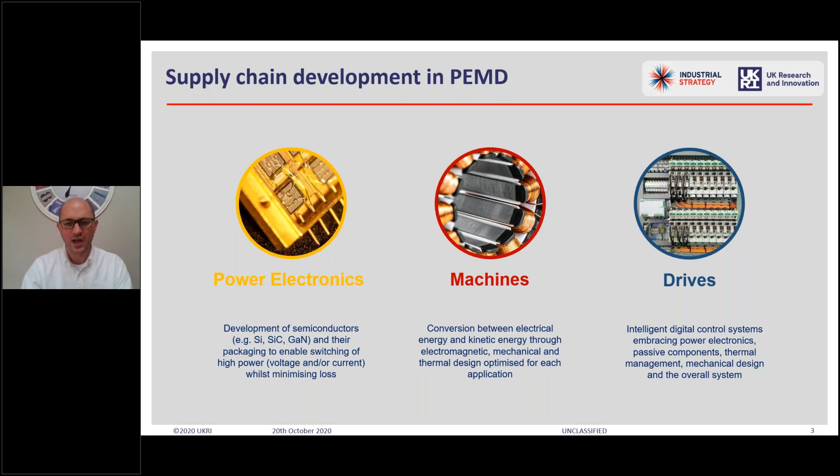And then we're talking about adding intelligence to this. Power electronics are great, motors are great, but we've got to add the intelligence. That covers charging, it covers DC-DC conversion, it covers quality control of electrical energy - anything that really adds intelligence to the power electronics system.

We cover a huge range of sectors. So I've said we want to do these three technologies. In industrial drives we have world-leading companies here - robotics, energy I've touched on, but also marine, aerospace, rail, both rolling stock as well as infrastructure, off-highway, auto and personal mobility. One of the interesting bits for me, and really important to our challenge, is looking at the cross-cutting opportunities between different sectors.

How can we leverage learning, experience and expertise from one sector into another to reduce the time to market, increase volume, and therefore reduce the cost of those parts?

So with that, we are not looking at just providing the funding - we're looking at creating an ecosystem. The funding is there absolutely to do collaborative research and development, but we need to build an ecosystem of people around the country, companies doing that, from SMEs providing tier N services all the way through to the tier 1 and end OEM users, and providing that within an infrastructure such as Driving the Electric Revolution means we can link people together as well.

We can work in conjunction with RIA to go, well actually these people maybe in off-highway, or these people in energy, are looking at very similar requirements - have you spoken to them? Have you connected with them? Really provide more of that investor feel to the money without taking equity, to companies and projects.

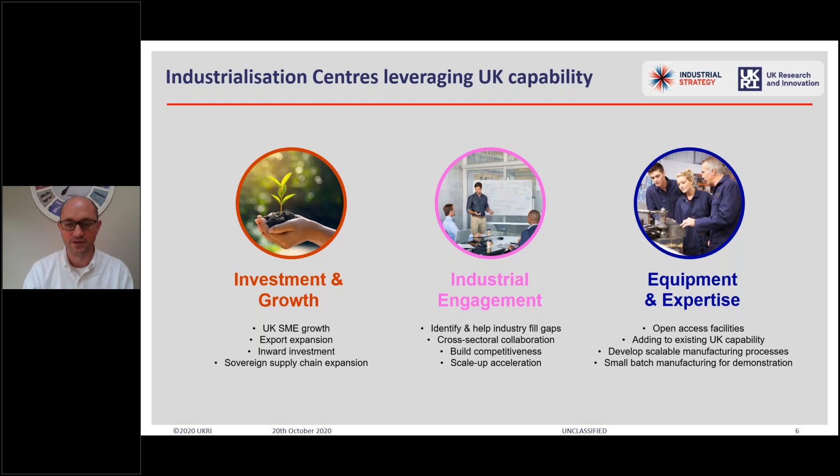And through these industrialisation centres, it gives a front door to the entire RTO and academic network, as well as any industrial companies who have equipment in this space that is open access. So a real opportunity and the front door to engage more.

Finally, the bit that is of significant interest to people: we've already done £7 million worth of programmes last year. We've already finished, closed, and we are now funding £5 million of short, high impact, high resilience supply chain projects on the back of COVID. And excitingly, probably of most interest, next spring we will be doing another £20 million-ish competition of flagship programs, looking at supply chain growth in power electronics, machines and drives.

In addition to that, we are doing work in skills. We have about £6 million ring fenced for that. It's going to make a difference. And if people are interested in that or any of the other areas, I would urge you to get in touch with me. My contact details are here.

Five minutes, not a lot of time to cover what is a huge area, but I'd love to speak to you more. So Richard, hopefully I kept just about the time for you. And I thank everyone at RIA for inviting me to be here with you today.

Top man, thank you very much, Will. That's really useful. You also win the Big Clock Award as well there, so that's a great job. Can I just ask you a quick question, Will, before you disappear?

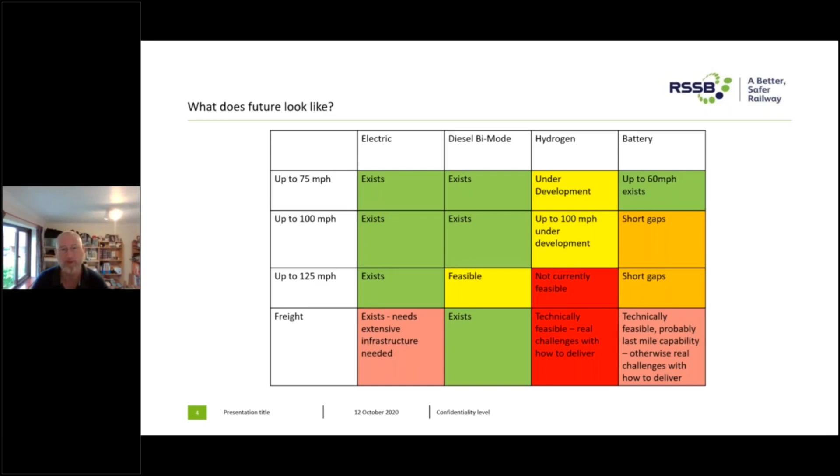The strategic approach, in essence, is where we do have an electrified network, to always run an electric train; where there's a strong case for electrification, to commit to making that transition; and then to make sure that the rail fleet, both passenger and freight trains, are enabled through conversion or replacement to run in electrified form on the electrified network. Where we know we're not going to be able to electrify within the timeframes, we should make an effort at the earliest possible stage to commit to putting in place hydrogen and battery options, so that we can deliver against set targets for decarbonisation over the transition to 2040, when we're removing all diesel-only trains, and on to 2050, where we're nationally now committed to a net zero target.

The task force looked at three key areas. Although we talk about traction being the really big issue, taking about 85% of all energy use directly and indirectly on the railway, we also have to worry about infrastructure and property. Infrastructure being very loosely what we require to run the trains, and property being stations and depots. There are some offices on the property side, but stations and depots are the key issue. We've subdivided those within the task force and within subsequent project work so that we're being clear about the areas we need to tackle.

I've said a little about passenger and freight, also about electrification, hydrogen and battery infrastructure. We also need to think about other aspects of infrastructure that support the railway, such as yellow plant and lineside generation in place.

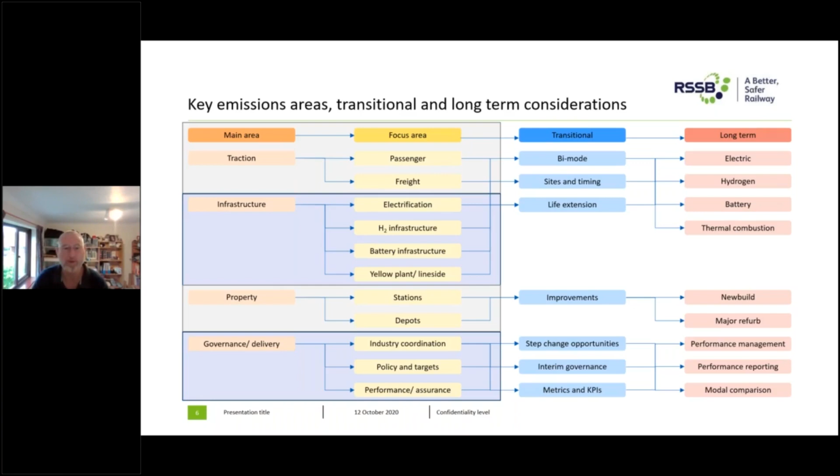And then within the governance and delivery side, we do know that we're going to have to hit interim targets, both to meet national carbon budgets, but also any requirements put in place on the rail industry to deliver intermediate decarbonisation improvements, as well as to look at step change opportunities such as where fleet replacements do take place. We also have to bear in mind that we're supporting DfT's efforts as part of the national strategy for decarbonisation within the Transport Decarbonisation Plan.

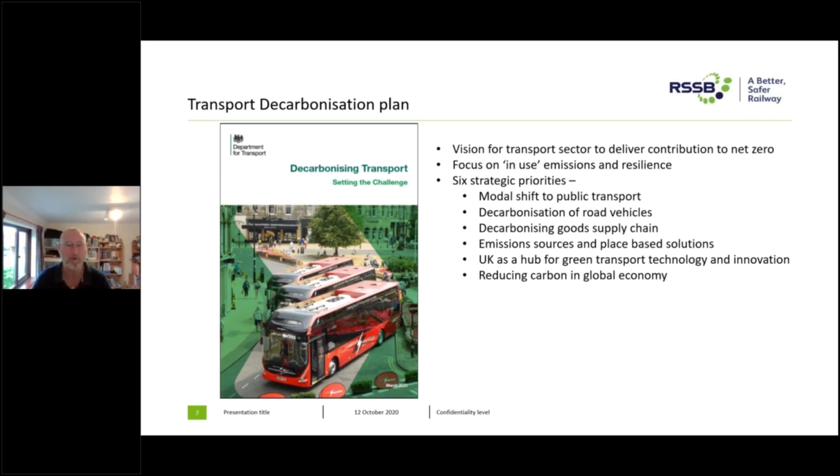There are two or three things I'd like to be able to pick out of this, which we will also be picking up in further research. So one is to look at how any work we do bears in mind the requirement to try to encourage modal shift to public transport. Second one is to recognise that we need to manage carbon in the supply chains and not just directly in the rail industry. And the third one is that we are playing a wider role within a carbon reduction of a global economy. And we do need to make sure that our solutions are bearing that in mind, both in terms of what we can learn from other sectors and also what we can maybe transfer in terms of knowledge to other sectors. We do have an existing programme.

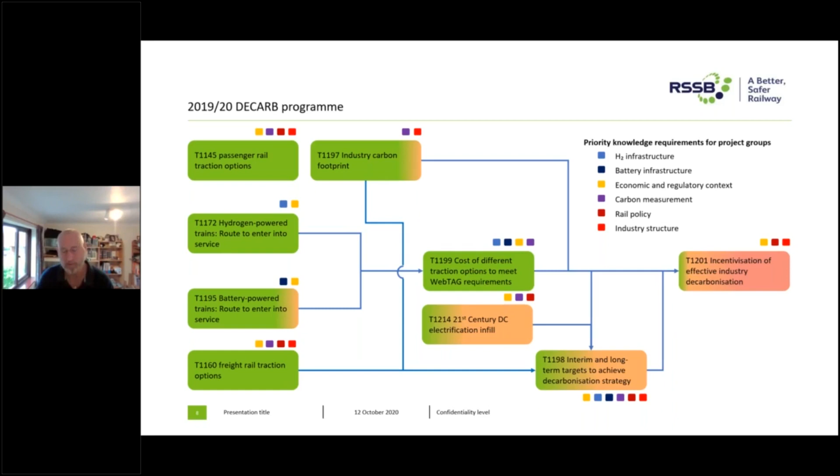And that's looking, as I say, with items such as national carbon budgets, control period funding, what may happen as a result of the Williams review, if that information comes out in time, and what will be opportunities for incremental changes through just natural improvements and also step changes in target setting. But that will also be picking up on the metrics that we might be using. 1201 finally will be looking at the mechanisms that may be in place already or that may be feasible, both existing within the industry and outside the industry, for incentivising decarbonisation. The research that has been undertaken and coming out of the final report and within RSSB isn't just disappearing into a pit. It's being used actively by a number of different organisations.

So Network Rail's Traction Decarbonisation Network Strategy has been identifying issues which we're now addressing. Similarly, the Transport Decarbonisation Plan has been informed by and will inform research within the Decarb 2 programme. And in the research that we've undertaken, either directly or indirectly, we have spoken with national organisations such as the Committee on Climate Change, which has helped to inform national targets.

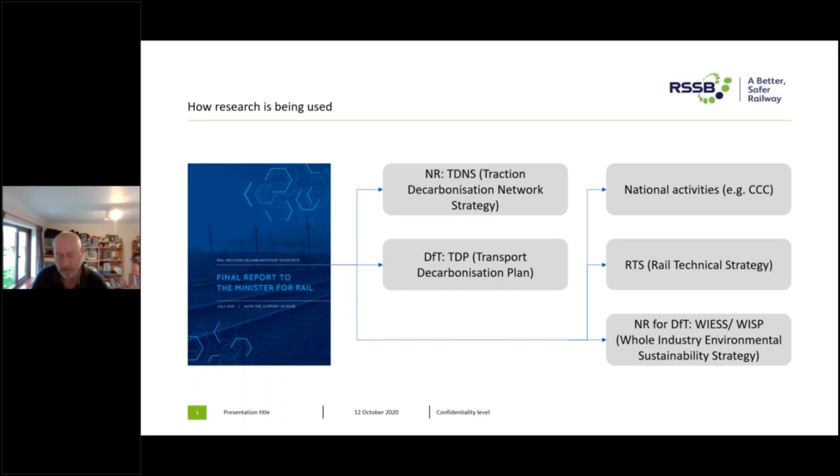And we are working with others such as the Technical Leadership Group, developing and managing the rail technical strategy, and also the whole industry strategic plan, which DfT has asked Network Rail to develop, where we are contributing to the whole industry environmental sustainability strategy. Landscape. What I wanted to be able to do was just show you the kind of range of different initiatives and stakeholders that are involved within this process.

It's a collaborative effort, and we do require a really good relationship between all of these separate groups to make sure that we're delivering in a timely, cost-effective and technically feasible reporting. And the Minister has recently asked the task force to continue to provide guidance in the delivery of the rail industry's decarbonisation programme. So we have also been doing other work within RSSB through other sources of funding.

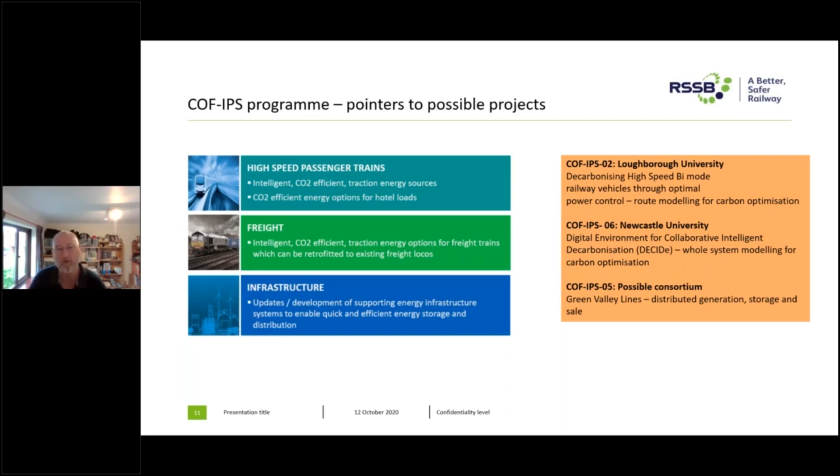I just wanted to highlight that there's been first of a kind funding in certain areas, and there have been three in particular which have been really interesting around high-speed passenger trains, freight and infrastructure. The projects on the right-hand side were genuinely feasibility studies, looking at the way that we might be able to use renewable energy on the network, how we might be able to optimise route carbon, and how we might be able to optimise system-wide carbon. And those are just at very early stages, but one thing that it has done is generate a lot of new ideas, and you'll see that we've reflected those in the work that we're doing in the future.

So what we are trying to do is to identify gaps in the knowledge and skills within the industry and start to identify how we may be able to plug those, where we're working on cross-cutting issues involving two or more entities within the industry, where it's not obvious that any one of them can deal with it on their own, so that there is a degree of cooperation involved, and that we are focused on the short to medium term, but that we carry on bearing in mind the long-term requirements, particularly in areas where we're supporting other work streams such as TDP and TDNS, but also giving opportunities for members of the industry to develop their own knowledge and understanding, either through consulting work they may be doing or participating in steering groups.

And we appreciate that these are relatively small projects, but they are giving very strong indicators as to where the industry might have to head in the future. So if anybody's interested in getting more involved in these, we'd be delighted to hear from you.

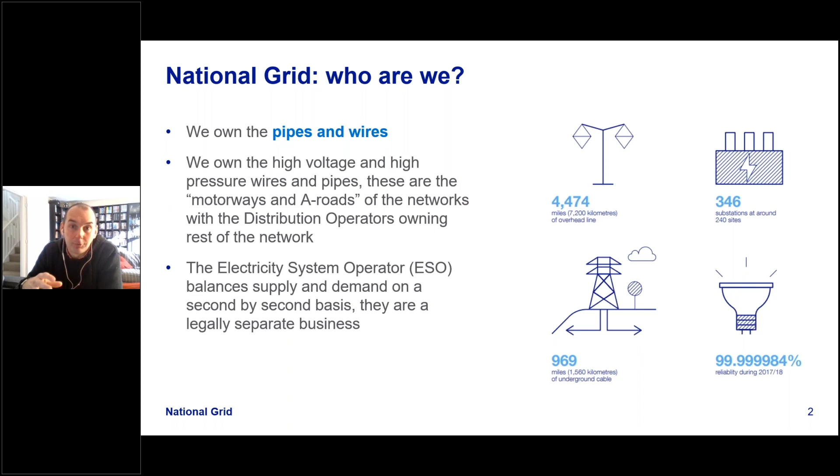We also have a system operator part of the business. This is a separate, legally separate part of the business. They're the part of the business that balance supply and demand on a second by second basis. They're the people you'll often see on television. They have a very grand control room, and they will talk about things like TV pickups and what happens when major sporting events go on. So they're the people that do the day-to-day operations of the system. I'm in the part of the business that owns the physical infrastructure, just to make that distinction there.

So first is transport and National Grid. So why do you have a team that looks specifically at transport, which is my role? So if you're going to decarbonise the UK economy, you know we have this 2050 goal of reaching net zero. How are we going to achieve that? We have to effectively decarbonise every single sector of the economy.

And when we look at transport, of course, people will say, well, cars are absolutely the focus. You need to get cars off petrol and diesel and onto electricity as well. Absolutely, and that is the focus. But because we have a net zero target, we can't ignore other forms of transport. And again, as passenger cars start to electrify, you've seen the uptake of electric vehicles, the onus will then be on other forms of transport to decarbonise as well. And we will be left with increasingly more challenging areas to decarbonise.

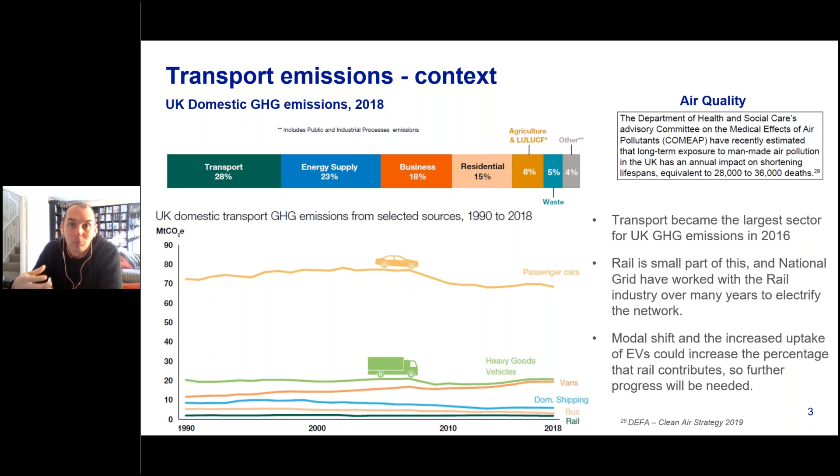And you're also potentially picking up a kind of modal shift where you may see more freight, for example, moving to rail, and rail becoming a larger percentage of the overall transport emissions. So absolutely the focus needs to be on all areas of transport, not just cars. So that's why we're interested there.

I'm not going to spend too much time telling this audience what infrastructure already exists at the moment. What I will do is put a little bit of an energy lens over the top of that. When we look at the rail system, we see a significant amount of it already electrified. We have around 42% electrified. And when we look at rail decarbonisation strategies, I'll pick up the TDNS, for example, here, it looks like significant further electrification will be required to meet those decarbonisation targets.

And we know how that can be done with overhead lines or third rails. And this is something where National Grid already serves as supplier of infrastructure and electricity to Network Rail. This is already operational, this is already proved, and we know how to do this. This is almost a little bit business as usual.

So it's a little bit more interesting: what about the parts of the network that can't be electrified like that? And the two solutions that come out, of course, are hydrogen and battery. Both of these are possibilities. Of course, we saw the first hydrogen train on the UK rail network relatively recently. We're going to hear more about that later.

But of those two solutions, neither of them is perfect in that they can't necessarily do everything by themselves. So are we going to see a kind of patchwork of all of these solutions? So electrification, batteries and hydrogen. That's certainly how we think the rail network will look from an energy point of view. So let's look at those in a little bit more detail.

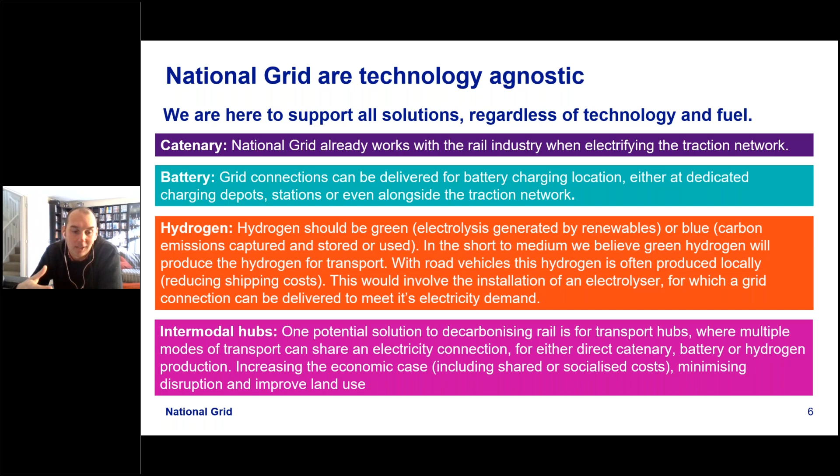So absolutely, this is something that needs to look across not only energy, but other forms of transport as well, to see what is the most optimal way we can make use of energy infrastructure, minimizing disruption and looking at improved land use.

So to summarize up here. Grid infrastructure will need to enable this future. Electric energy infrastructure in particular will be critical to this, either the direct electrification, charging batteries, or for that production of local hydrogen. I'm thinking about grid requirements up front. It takes time to deliver all infrastructure, as we know on here. So we need to be thinking about the rail solution and the energy solution in parallel so we can get that cost-effective solution. And key to that absolutely is collaboration.

This will be key. We've already noted that from previous speakers here, but I will echo that from an energy point of view. We're really keen to work with people in the rail industry, how we can help as energy networks to decarbonize the rail industry.

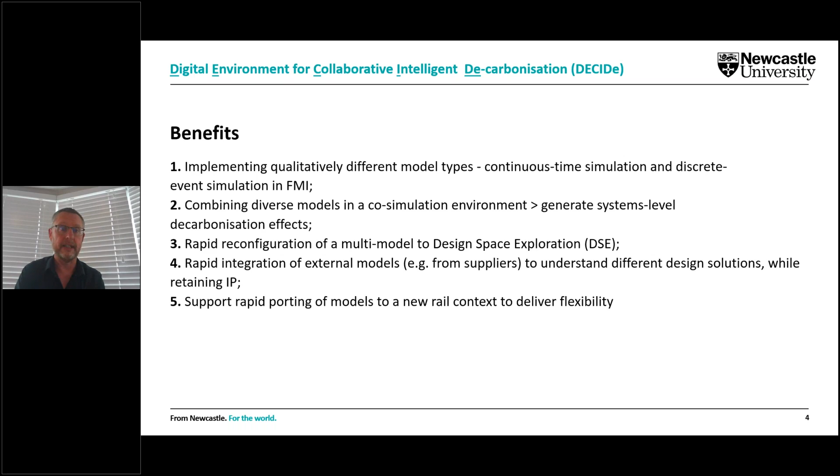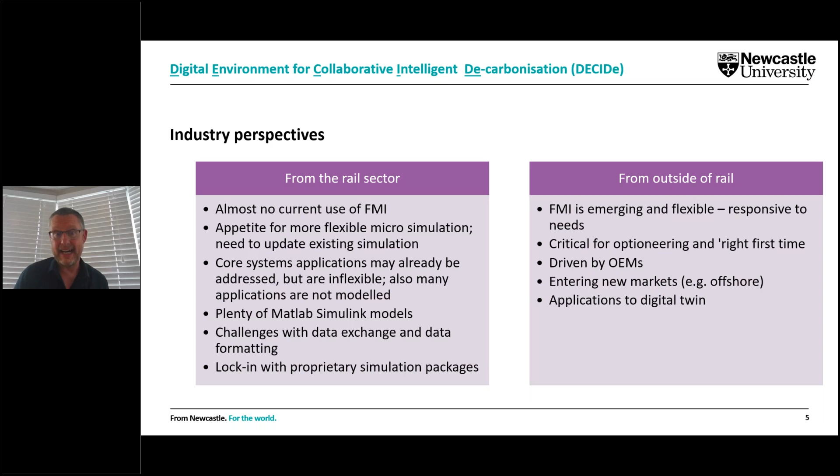So what I'd like to do next is talk a little bit about some examples of implementation. We developed 4 models based around a section of infrastructure and rolling stock from a Tyne and Wear metro.

FMUs included a movement authority model, which represented infrastructure and 2-aspect signaling, and interlocking for a section of the network between 2 stations. We had a driver model that responded to the signaling with power and brake. There's also a train model with braking, motor, and so on. Finally, we modeled a simple external power supply. For metro, this is 1.5 kilovolt overhead line.

A few things to note. We decided to have 2 trains and therefore 2 driver models in our simulation, so we can see how one train's behavior could influence another on the same stretch of infrastructure. Also, we developed 2 different types of train and driver.

There was a baseline version of the train based on current metro weight, but then another that was light-weighted and had regenerative braking. There was also a second version of the driver that was more reserved in power and brake usage, thus mimicking a defensive or energy-efficient driving style.

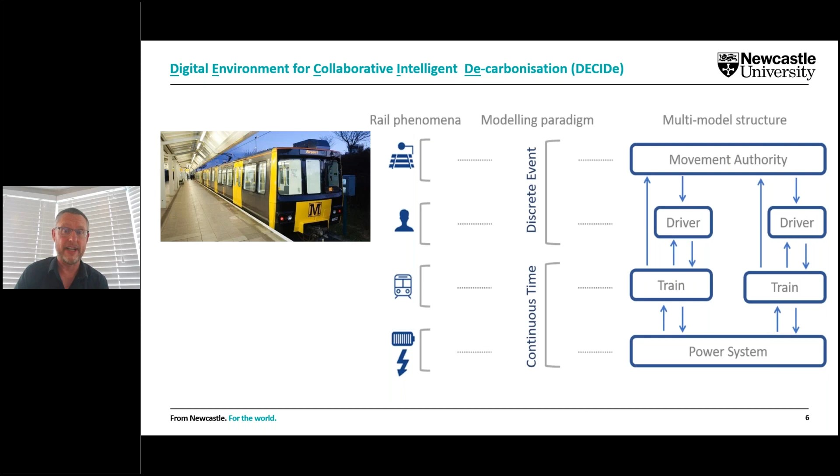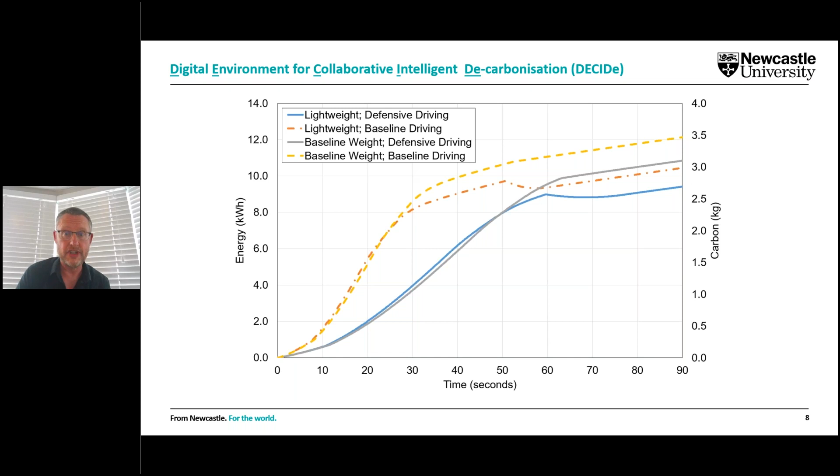In this way, co-simulation shows both how we can trial different configurations of a system and the kind of systems interactions that occur. We then wanted to show that we could add a third-party model.

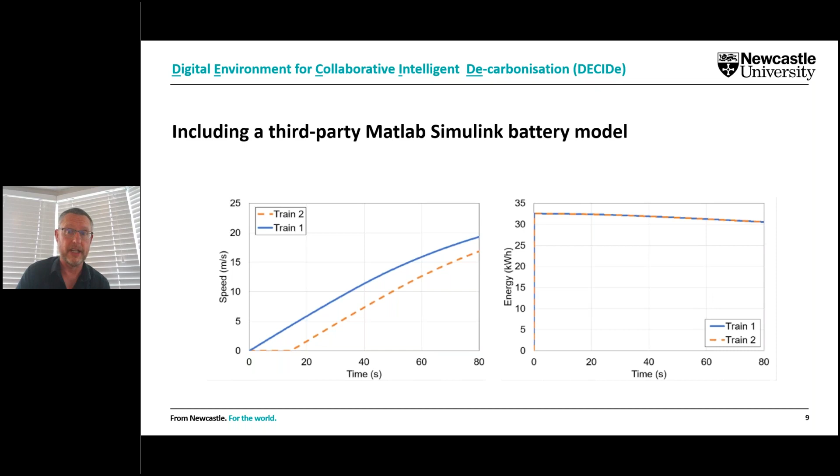Going one step further, we wanted to show how we could rapidly move from a simple urban model to a more complex mainline model. We've only implemented 1 train and 1 driver type, but we've ported our models to a mainline context. In our case, a simplified East Coast mainline from Newcastle to Durham, changed to a 25 kilovolt overhead electrification, suitable vehicle parameters for something like a Class 800, and implemented 4 aspect signaling.

And so our driver has been adapted so that it coasts, reduces power and brakes in relation to the state of different aspects.

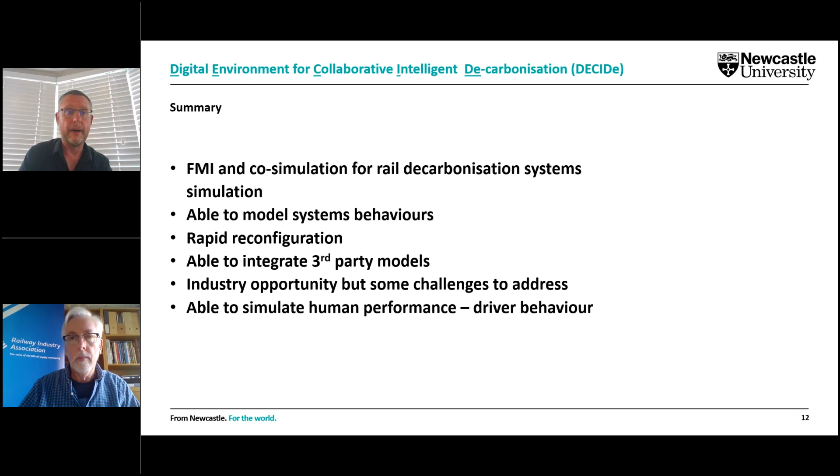And to conclude, as Andrew mentioned, we have thought about how our work fits in with the work of Loughborough, who presented earlier in the week. They've got their validated Class 800 model, which gives accurate CO2 estimation. We are looking at a 3-stage plan working with Loughborough to first wrap up their model with FMI, then make it scalable for any route, and then the 3rd stage is commercialization and make it system-wide.

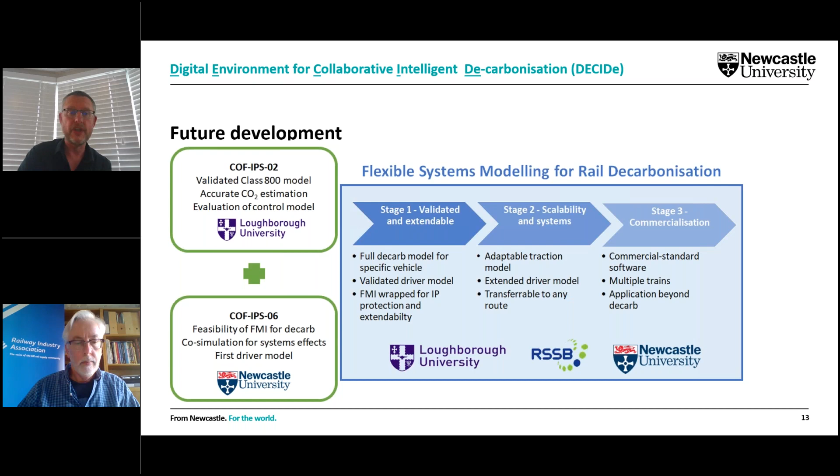So if you want to know more, there's some more details and outputs there, please drop me an email.

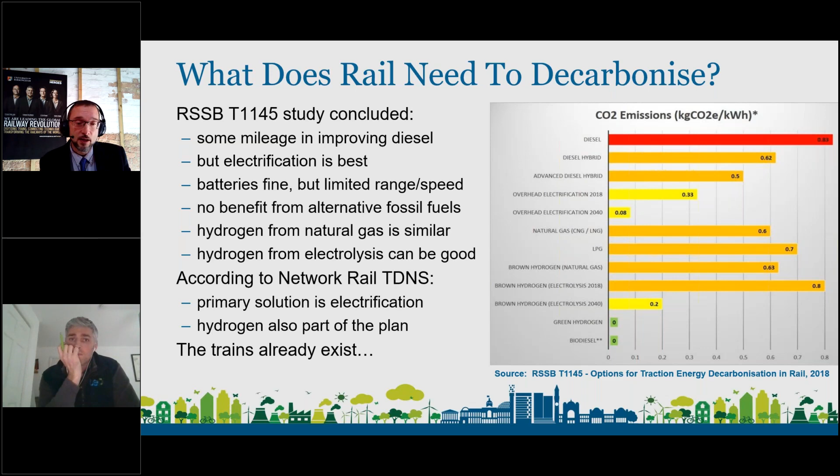Now, I suspect some of you have already seen this, but I'll show you a short video clip. This is the joint effort by University of Birmingham and Porterbrook to develop the UK's first hydrogen fuel cell powered passenger train. And this is it actually running on UK mainline last week. So this is breaking news if you want.

So this is Helen Simpson, who led the project from Porterbrook's side, and took the vehicle through an awful lot of safety approvals to actually get us to this point. So effectively, the critical point here is hydrogen trains are approved for running on UK infrastructure, and that was Stuart Hillmansen who led the work from our side. I like to see the steam coming out the side of that. Anyway, so that is a hydrogen train running on the network.

So moving on from there, of course, we need some hydrogen. And let's just see if this will click forwards. There we go. So what are the hydrogen supply requirements? Of course, it's got to be low carbon, so we're talking produced from electrolysis. We're going to say for the time being that carbon capture and storage is on the horizon, but it's not here anytime soon. So we are talking electrolysis.

And of the requirements, one of the key ones for the railway, of course, is we've got to have a reliable supply of hydrogen. If for any reason your equipment that's making the hydrogen falls over, you've got a big problem - no hydrogen equals no train service. And yes, you can store quantities of hydrogen, but not in the same way that a diesel depot might store maybe 3 or 4 days diesel on site. With hydrogen, you're talking a day or two at most. So your production system has to be very reliable, and thankfully, certain of the bus fleets, their electrolyzers have proven to be extremely reliable, so that's helpful.

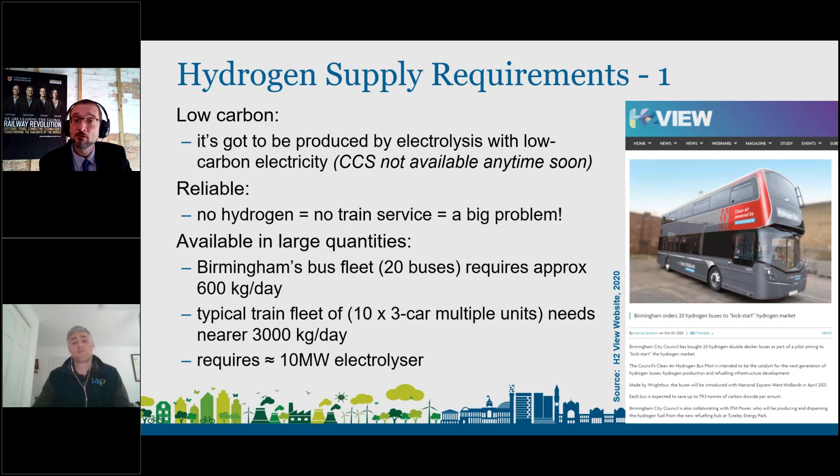Now again, 10 megawatt electrolyzers are already being installed in various places in Europe. So that technology is doable, that technology is available. Now on to the next slide.

This is interesting. You want to produce your hydrogen, your fuel, near your refueling point. That was mentioned by the talk by the National Grid. And just to ram that home, if you get hydrogen delivered by road, let's first look at diesel and take that as a benchmark. So a single heavy goods vehicle can deliver enough diesel to refuel at least 20 regional trains, possibly a bit more, but at least 20.

Because of the nature of hydrogen, if you're delivering it as a compressed gas, that same HGV can only carry enough hydrogen fuel to refuel just 2 regional trains. Delivering hydrogen by road for a fleet of any size just doesn't make sense, because your HGVs can be running on diesel for one thing.

And then we get on to the question of money. Now, at the moment, the railways run reduced duty diesel, so we're talking around about 60 pence per litre, and a typical regional train, something like a Turbostar, will use a litre a vehicle a mile, so you end up with 60 pence per vehicle per mile. Now, if we look at hydrogen, if you want hydrogen to match that pence per mile, you need your hydrogen down at about £3 per kilogram. And if you know anything about hydrogen prices, that's quite ambitious.

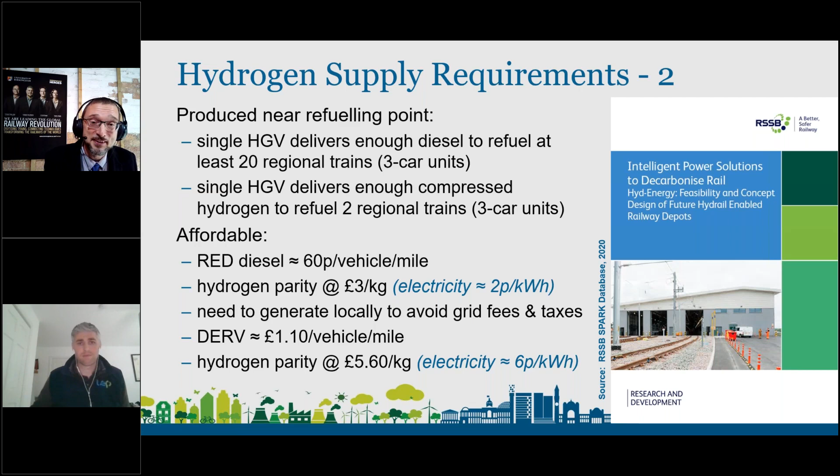We believe that heat, power, transport and waste should be joined up, and so we're looking at energy solutions. It was really interesting to hear Andrew Kuth earlier talking about integration of wider infrastructure, sustainable transport systems, and likewise with Russell talking about intermodal refueling hubs. It's exactly what we've been developing at Tyseley Energy Park: a refueling station that's publicly accessible, technology agnostic, having lots of different fuels there, all underpinned by renewable power.

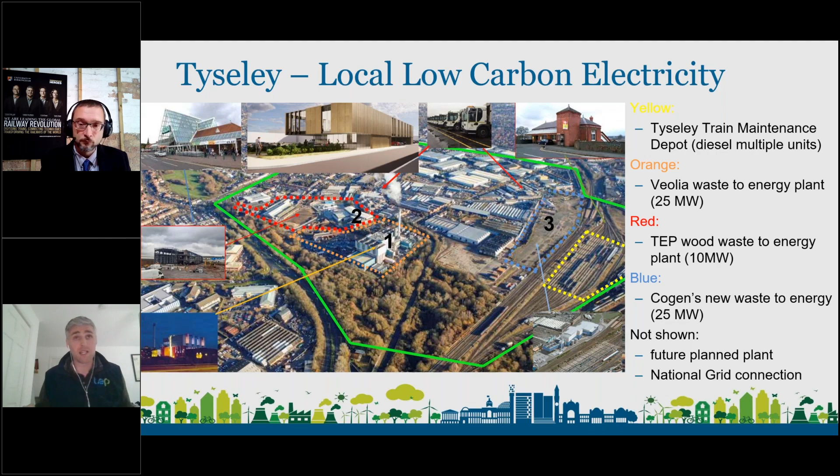So on site today, we've got a 3 megawatt electrolyzer. ITM Power have built that, and that will be refueling those 20 buses. We know that there's spare capacity in that, and the spare capacity might be enough to refuel, say, 2 to 3 trains. Hypothetically, wouldn't it be exciting if you started a trial? It's not beyond the realms of possibility to take a tube trailer from our site over to the railway station and be refueling a small amount of trains to prove a concept.

And then also thinking about those generating assets, if you had 100 megawatts of power, that could refuel 200 to 300 trains, which clearly you probably wouldn't want to do because of all the things Stephen mentioned, not least storing large volumes of hydrogen. But if there was a case for hydrogen, and we agreed that producing a multimodal refueling station like this that benefits other people is a good idea, wouldn't it be exciting to all plan for this and do something in a location like this where you've got a large amount of renewable electricity?

This isn't unique. I'd say that there'll be other sites across this country where you've got assets alongside Network Rail assets, where there might be waste streams or renewable power from wind or other renewable assets. So I guess the challenge to the rail industry is we need to start thinking about how we can identify these assets and how we can start thinking about energy systems that enable the growth of infrastructure, not just for rail, but other transport or decarbonisation of heat.

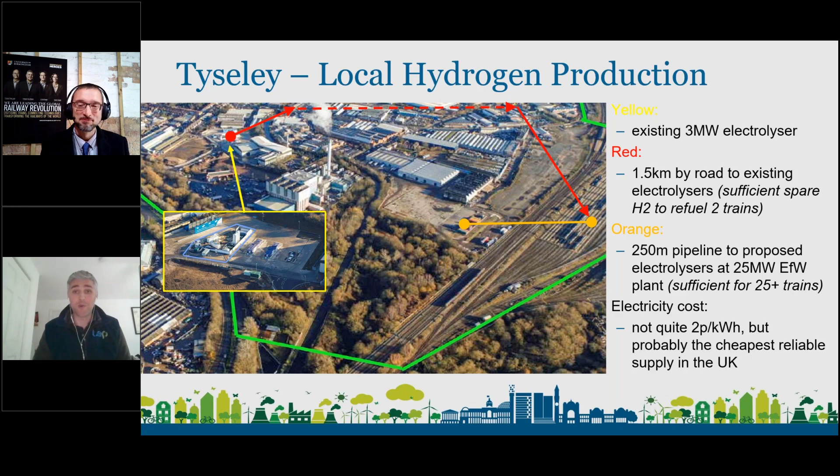Good, thank you very much. That's a brilliant ambition, David. I absolutely love the project, and hope I'll be talking to you about that later on after the event, actually. Thanks to both there, to Stephen and to David for that.

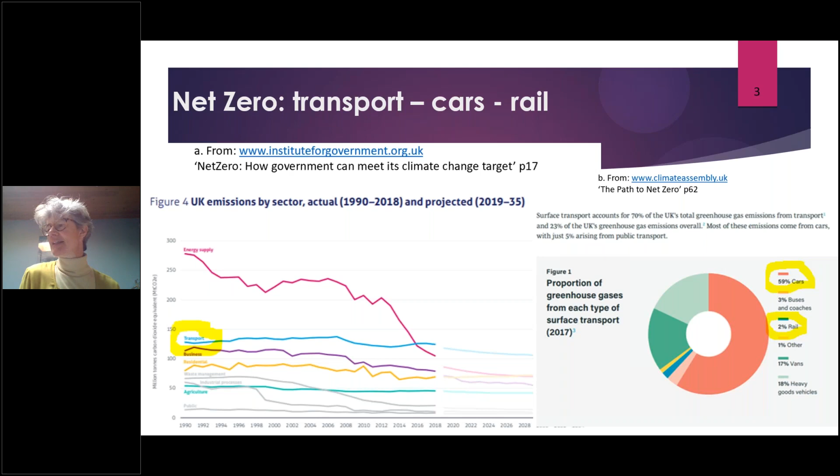He mentioned freight modal shift, and I think that a more exciting challenge is the car modal shift, because it's not just how cars are fueled in terms of electric, because of the particulates from the rubber tyre on the road, as opposed to our nice clean steel on steel interfaces. So one of the projects that I've been doing, that's radical for the railway industry, is Why Car?

It's a bid at the moment, to ask people to ask themselves why car. Rather than looking at that incremental marginal journey when I've got all these sunk costs in my car anyway, and I'm looking at the petrol versus the bus fare versus the train fare and saying it's not really worth it, I would look at the whole cost of my car and say, do I need that car, do I need a second car, to try and promote some more holistic pro-planet decision-making.

It's a very easy win on transport decarbonisation if people change mode from a more heavily polluting mode to a significantly less one. And then I've done some work with cleaner diesels, which haven't been mentioned during this conference yet as far as I'm aware, catalytic converters, making what we've got now immediately loads better. So that's unlocking that benefit from retrofit projects. And then, yes, I've done some work on hydrogen and battery stuff as well, and it is very exciting, and I am not decrying that in any way.

But what I wanted to offer was my fourth and fifth ones on my list there, something very different in terms of flywheels that can really change the battery life thing, because people haven't mentioned what happens after the battery's over. Battery life is not as long as train life, certainly, and what do you get left with at the end of that? Whereas a flywheel could radically change the battery life. This is something that's under development that I want to show in the next few slides.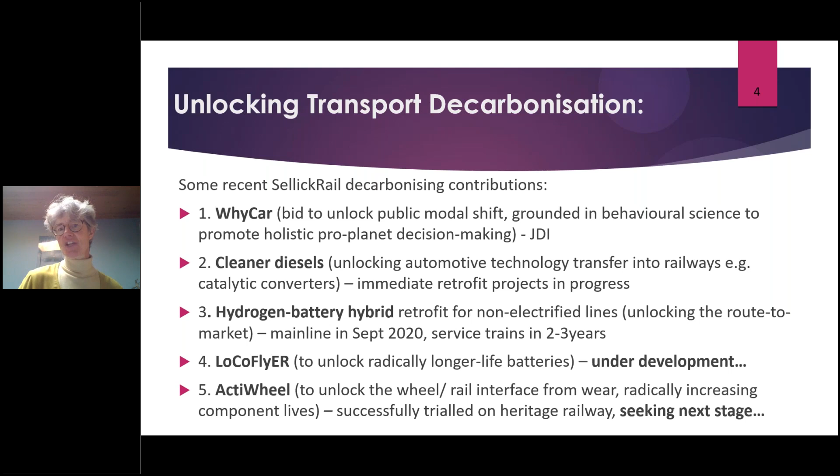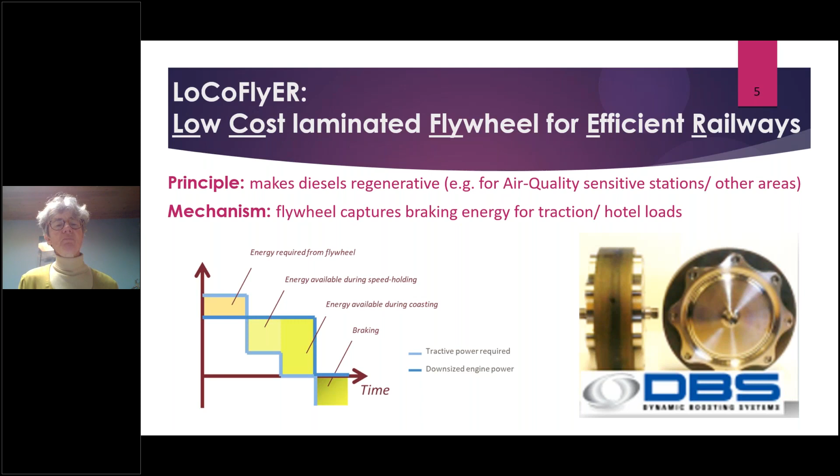So my next slide tells you about the premise of a flywheel. It can smooth out. We can effectively make a diesel or a self-powered vehicle regenerative by capturing the energy on braking or coasting and then using it for extra oomph. So we need a smaller energy supply to get going when we need a bit of accelerating. This is a particularly nice flywheel because it's made out of carbon steel. So it's very straightforward, it's cheap and cheerful, and it's robust.

And you know, to the very old railway engineer that I am, thank you, Richard.

That's where there might be some ways that might be interesting for the national grid, where it's more challenged in providing the very significant load that rail electrification is asking for. Russell Fowler might be interested in that kind of smoothing activity, or in making Birmingham New Street clean, for example, so that very quickly those diesel trains can turn off and the flywheel can help them through.

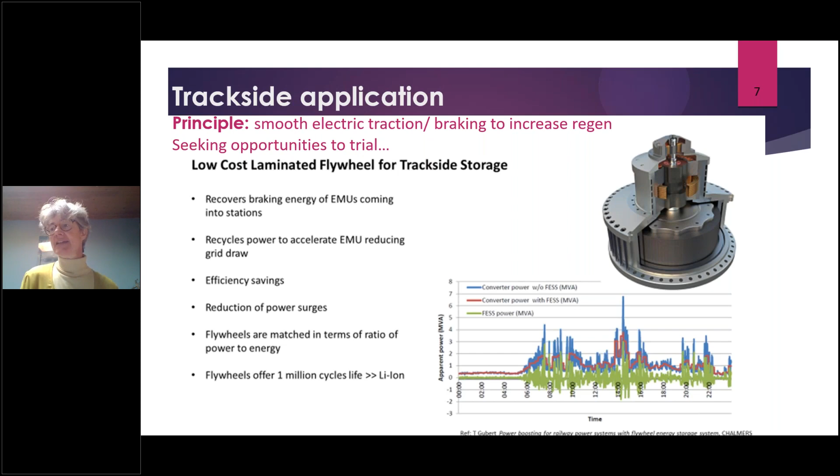And on my last page then is ActiWheel, which is this really radical difference of saying, well, we don't need coned wheels. We can have little independent wheels and go around corners really easily. And talk about lightweighting vehicles. This will really radically lightweight vehicles, because we don't need pneumatic systems. We don't need brakes. We can brake on the little motor that's mounted on the wheel.

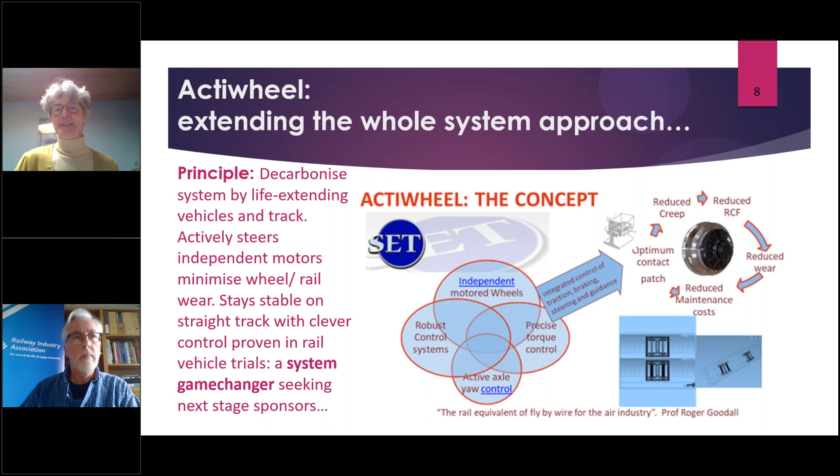And that's got, with my chums from Loughborough University and Huddersfield University, to proving on a heritage line. It does go up and down, and it's how to get that game changer out there in the industry more radically. Thank you very much. Sorry, that was a scamper.

Did you have anything to say over that last slide, or is that just a contact slide? Great, job done. Certainly, I'm with you on ActiWheel. Not that I'm not with you on anything else, but particularly ActiWheel. That's been knocking at the door for so long. So come on, industry, wake up. Let's go with that one.

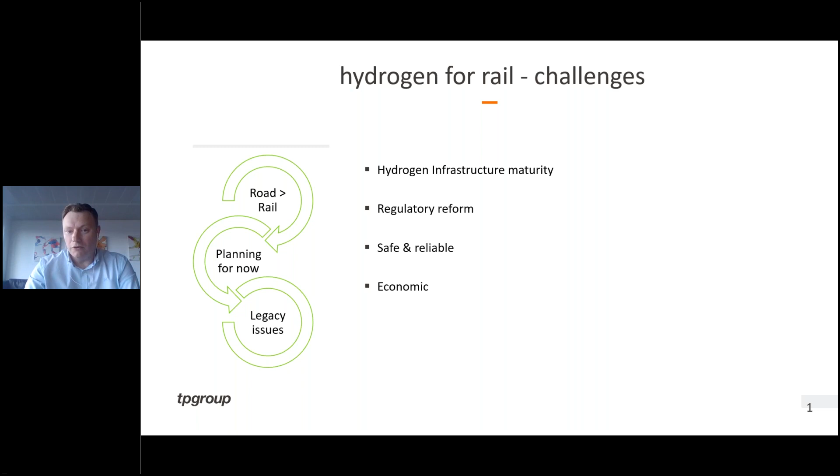So TP Group and hydrogen. Well, TP Group, as I said, we've been working in the defence sector. We've been supplying electrolyzer technologies and carbon capture systems into the submarine programs, nuclear submarine programs, for many years. So we're used to working on developing really safe systems, and our electrolyzers have uptime of about 98%. They have to have, because they're generating the oxygen people breathe, they're generating hydrogen that we deal with on board

in a safe manner. We've developed a range of technologies to manage hydrogen in those environments, because you can't leave equipment with high pressure hydrogen sitting in it when you have a lockdown or emergency shutdown situation. We've been operating these technologies through life and supporting our customer, the MOD, and other customers similar to them, and keeping systems working. So our experience is very much around high reliability, making systems safe, and making sure people know how they're operating.

In terms of the rail sector, what we've taken as a strategy is to develop with partners. So we've partnered with Vanguard Sustainable Transport Solutions and Fuel Cell Systems. Both those guys worked on the Hydroflex train, and we're bringing to market hydrogen refueling technologies for the rail industry, something that's been designed in other markets, and we're bringing that technology across.

So TP Group is a UK business. We've got over 63 years of manufacturing experience in the UK. We've been working across nuclear, defence, oil and gas, aerospace, and we have worked in rail through a business we acquired earlier this year. We have safety consultancy businesses. We have hydrogen safety experience through our work in defence, and we're very used to running complex programs. To give you an example, some of the programs we run are about £20 million, and they run across multi-year.